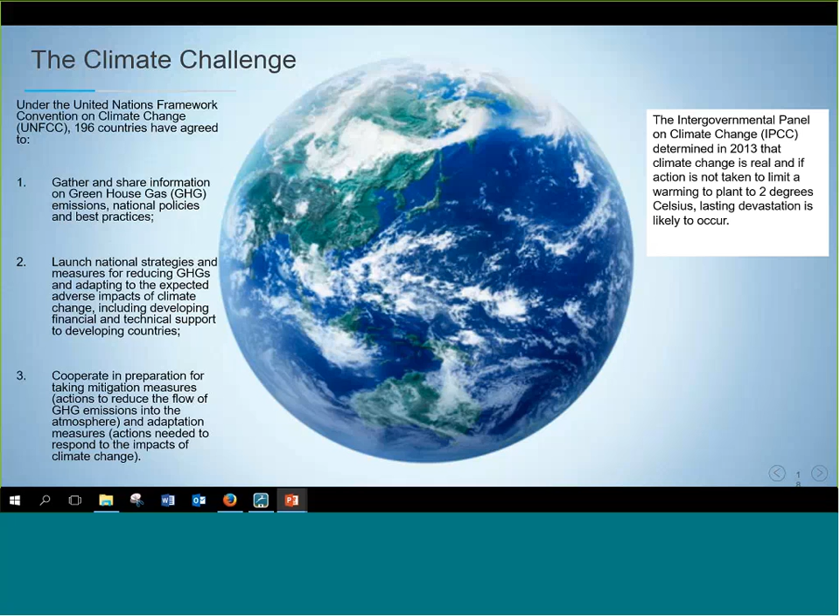On the next slide, you'll see why Paris is important. So far, 196 signatories to the convention will bring to the table intended commitments to reduce each member nation's greenhouse gas emissions through something known as Intended Nationally Determined Contributions, or INDC. In addition to negotiations, negotiators will focus on discussing financial mechanisms to help developing nations achieve their commitments. Additionally, other UN agencies will discuss global policies to reduce emissions, including airline fuel economy and maritime issues, just to name a few, through the International Civil Aviation Organization as well as the International Maritime Organization.

On the next slide, we'll talk a little bit about how we got to Paris and why Paris is important. International climate commitments to limit greenhouse gas emissions really took off in 1997 as many nations signed the Kyoto Protocol on the convention to limit greenhouse gas emissions. Since that time, the signatories to that protocol, known as the Conference of the Parties, or COP, served as a forum to meet periodically to report on activities to reduce emissions and share best practices. The next Conference of the Parties, COP21, will meet in Paris to discuss a successor legal instrument under the umbrella of the UNFCCC to reduce greenhouse gas emissions, with the goal of limiting global warming to just 2 degrees centigrade by 2100.

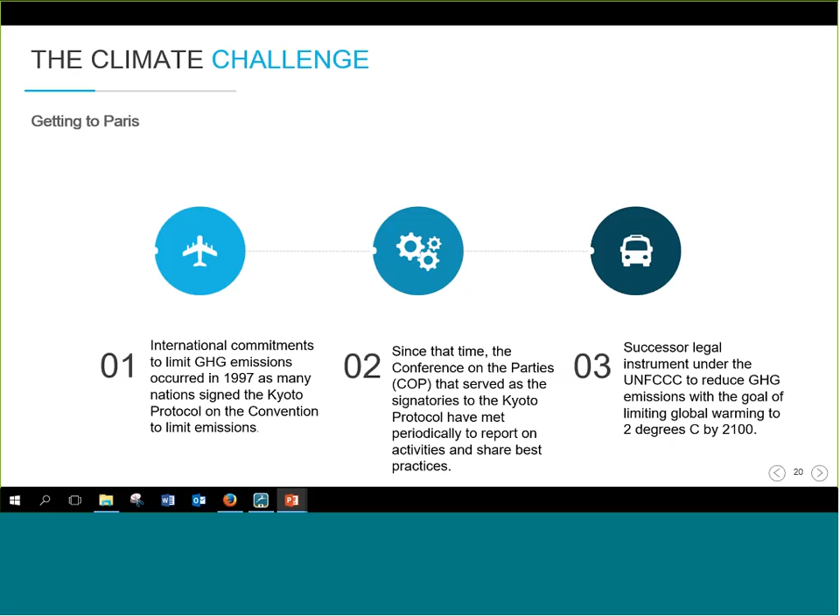On the next slide, we'll dive into a little bit about how the United States intends to meet its climate pledge. The U.S. INDC, the guts of the commitment, is intended to reduce greenhouse gas emissions by between 26 and 28% by 2025 relative to 2005 levels. That is the U.S. climate commitment.

And here on this chart, you can see information pulled from the International Energy Agency that's done some analysis on how exactly the U.S. will get to its climate commitment by 2025. Much of the U.S. commitment relies on regulations that are either promulgated or proposed. The largest source of greenhouse gas emissions from the United States comes from power plants.

And the proposed Clean Power Plan seeks to reduce power plant emissions. Roughly half of the U.S. INDC will be achieved through the proposed Clean Power Plan. However, that plan faces growing legal and even political challenges that may undermine its contribution towards emissions reduction. That makes other features of the U.S. INDC in the commitment that much more important.

In the U.S., the second leading source of greenhouse gas emissions is attributable to transportation. Rules on the books pertaining to fuel economy standards for light-duty vehicles, the so-called CAFE standards, along with similar standards for heavy-duty commercial vehicles—the Phase 1 standards in effect for model year 2014 through 2018, and the proposed Phase 2 standards that build on Phase 1, set to take place 2021 to model year 2027—are estimated to contribute collectively about 10% to meet the U.S. greenhouse gas emission reduction goal laid out in the U.S. INDC.

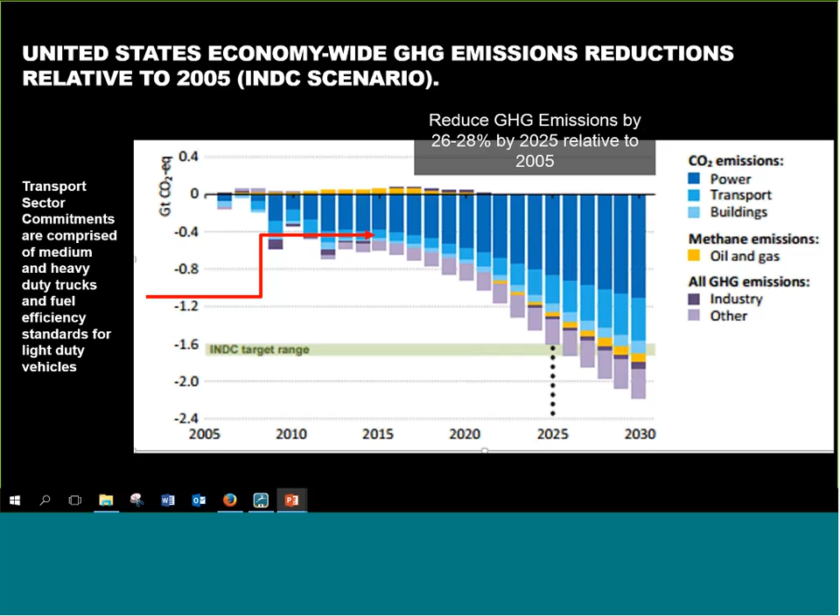Thank you, Ezra. This is Allen Schaeffer speaking. Now we'd like to turn to which technologies will help achieve these greenhouse gas emission reductions. The complexity of the challenge to reduce climate change emissions is enormous, and the plan to reduce those emissions must be considerate of the near term and the longer term of various capabilities and technologies.

We believe that some of the criteria that must be considered in the evaluation of which fuels and technologies, primarily for transport and industrial use, are here on this slide. Technologies that are available, affordable, reliable, proven, efficient, maintainable, and clean are ones that will play and should play a leading role in both the near-term and the long-term strategy as we work to reduce greenhouse gas emissions around the globe.

From a transport perspective, we believe that the diversity of the challenge and the number of people that move around the world will require many fuels and technologies, and what works in one particular place will not necessarily work in another. This represents the broad range of fuels and technologies now under consideration or even available in some parts of the world to power vehicles, engines, and equipment.

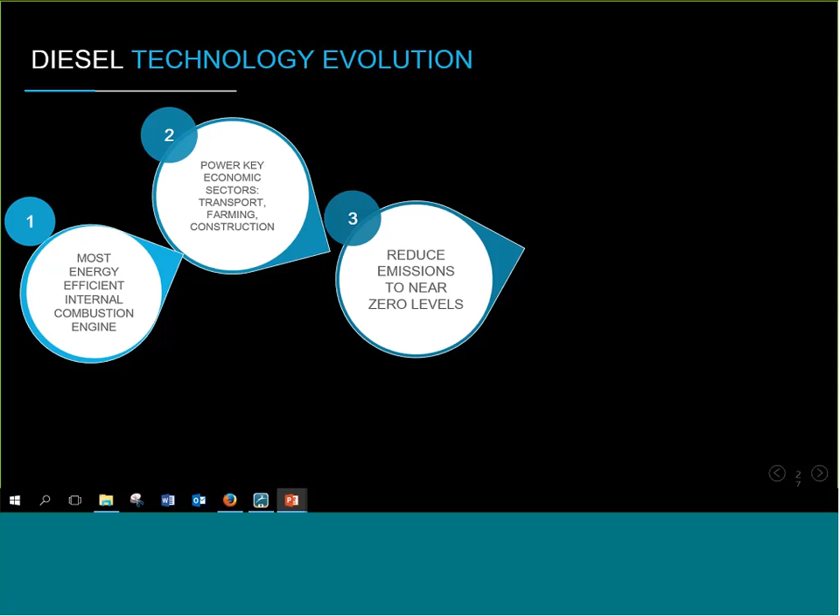Diesel technology has been on quite an evolution over the last 15 years. Beginning here in the U.S., we understand the energy efficiency capabilities of diesel engines as the most energy efficient internal combustion engine available. That has led to its position today powering key sectors of the economy. In the last 15 years, we have worked to reduce emissions to near zero levels. Emissions of particulates, oxides of nitrogen, and other compounds from new engines are now near zero levels. Going forward, we are seeing diesel engines being investigated and modernized for increased efficiency, and hybridization is part of that, but also the expanded use of renewable biofuels.

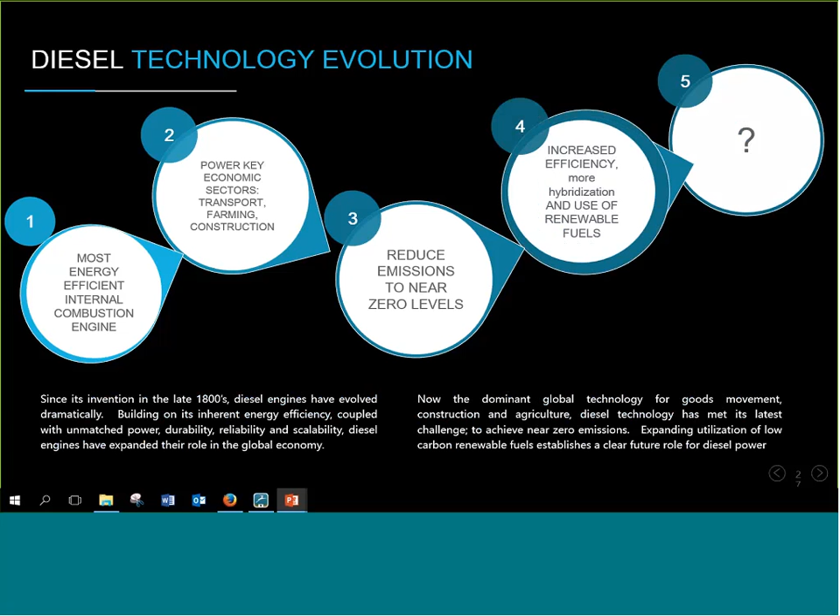And where does the future take us from there? We are yet to envision that completely. However, we can expect an expanded use of diesel power throughout the globe. Being able to compete and provide an advanced technology and fuel in so many places to serve so many needs is essential, and diesel can do that because of its key attributes of being efficient, economical, powerful, and very low emissions today. It is also a fuel that is widely available throughout the world, and its fueling infrastructure, maintenance networks, and other supporting structures are well in place.

The last 15 years in the U.S., we have been working to transform diesel to a clean technology, and this has involved three basic steps. First, the introduction of ultra-low-sulfur diesel fuel. This provides a foundation from which advanced engine technology can be developed and manufactured. And finally, the use of advanced emissions control technology, such as particulate filters, catalysts, and selective catalytic reduction systems can be incorporated. Together, these three pieces make up the clean diesel technology available throughout the world today.

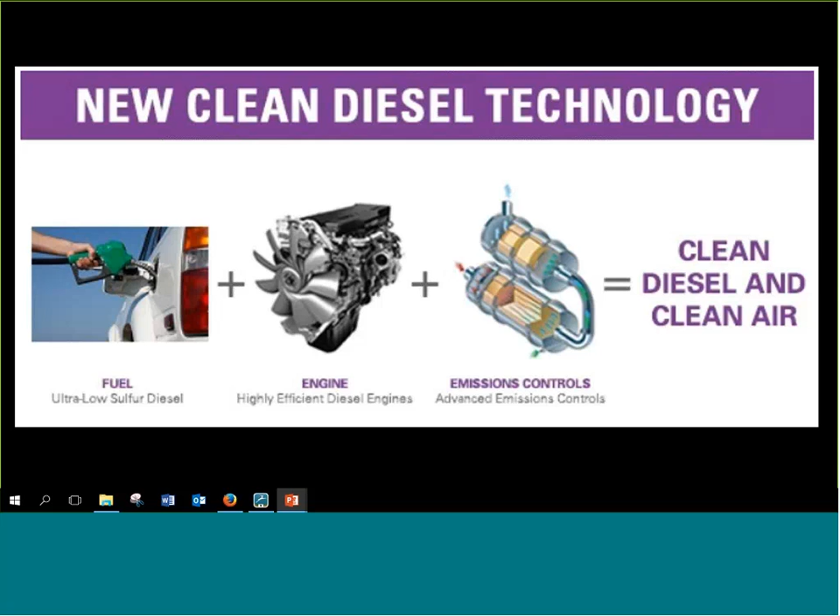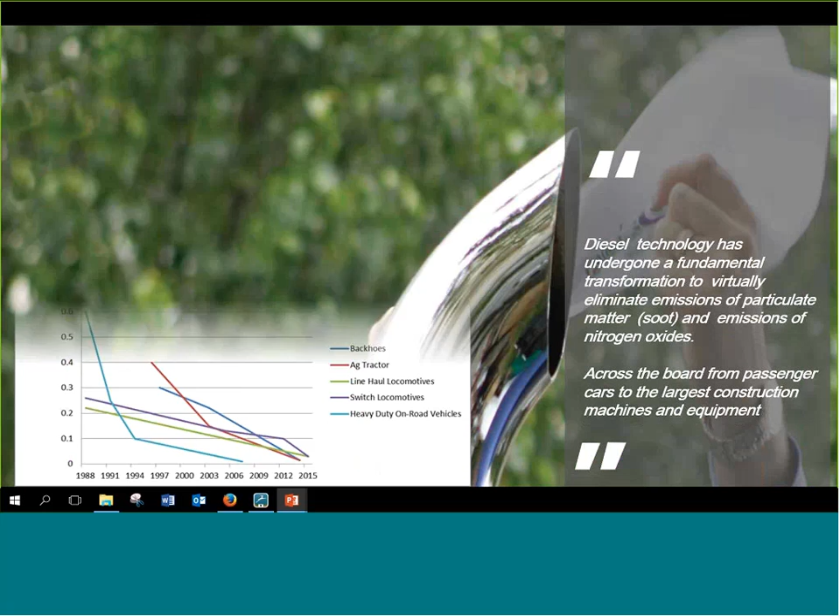One of the key factors of getting diesel to near clean has been the need for ultra-low-sulfur diesel fuel. As a result, we now see the availability of this fuel in the U.S. nationwide as our standard fuel and technology. Across the board, we can find these cleaner fuels being used in everything from passenger cars to the largest construction machines and equipment. And you can see the emissions progress that has been made with diesel of all kinds over the last almost 20 years now.

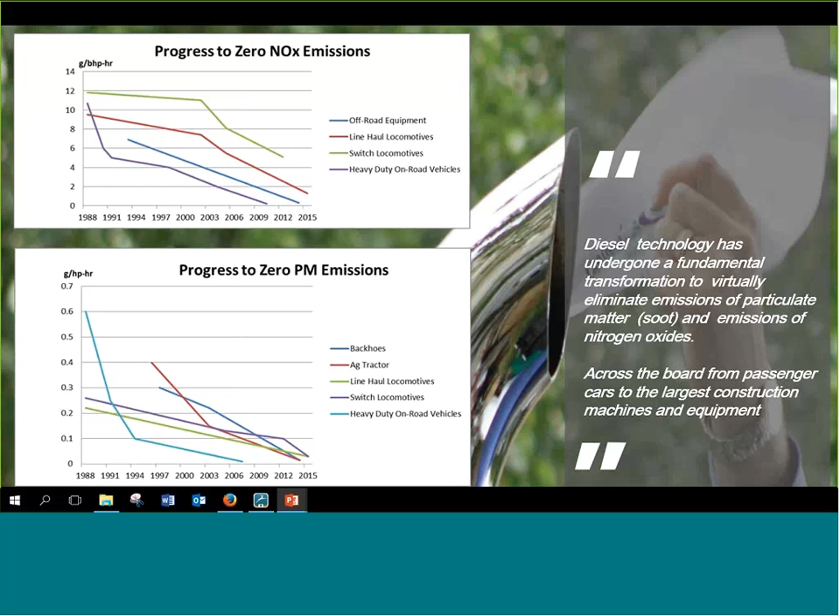This chart shows both the reduction in nitrogen oxide emissions and particulate emissions that have occurred in everything from off-road machines and equipment to locomotives and farm tractors. You can see here that all of these lines converge near the x-axis, or near zero. So today we are in a position of having diesel technology being very near zero emissions. And this positions the technology for the future.

One of the key aspects of that future is an expanded use of renewable and advanced biofuels. And we believe that those will play a key role throughout the world in helping to make sure diesel is a sustainable energy technology in the future.

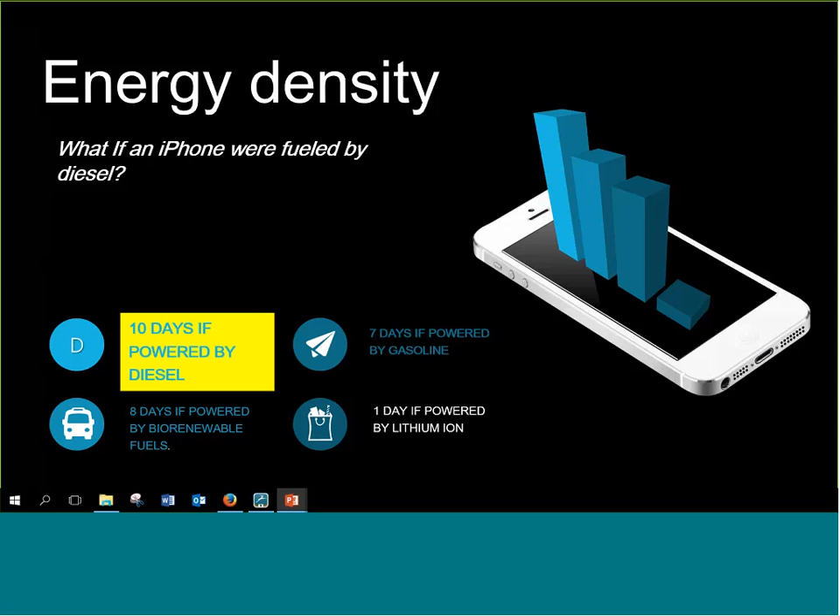One of the key attributes of diesel is its inherent energy efficiency and energy density of its fuel. We recently evaluated what would happen if an iPhone were fueled by diesel. Looking at the energy intensity of various fuels and technologies, an iPhone today, if powered by diesel fuel, would last 10 days on a single charge. The typical average use today is approximately 1 day if powered by a lithium-ion battery, which is of course what phones are powered by. This simple example provides insight into why diesel power is going to continue to be an important part of the future in meeting climate change objectives. That is because of the energy density of the fuel and its efficient combustion by the diesel engine.

We'd like to turn now to what is needed to help meet these global climate challenges relative to diesel technology particularly.

First and foremost is the availability of ultra-low-sulfur diesel fuel. This map shows the relative levels of diesel fuel sulfur around the world today. You can see in the lightest blue areas, North America predominantly has very low sulfur diesel fuel. There are some parts of the world still finding very high levels of sulfur in their diesel fuel, and parts of South America also in some of the higher ranges. But having ultra-low sulfur diesel fuel is critical to making future progress, both in reducing carbon emissions as well as reducing emissions of particulate and nitrogen oxides.

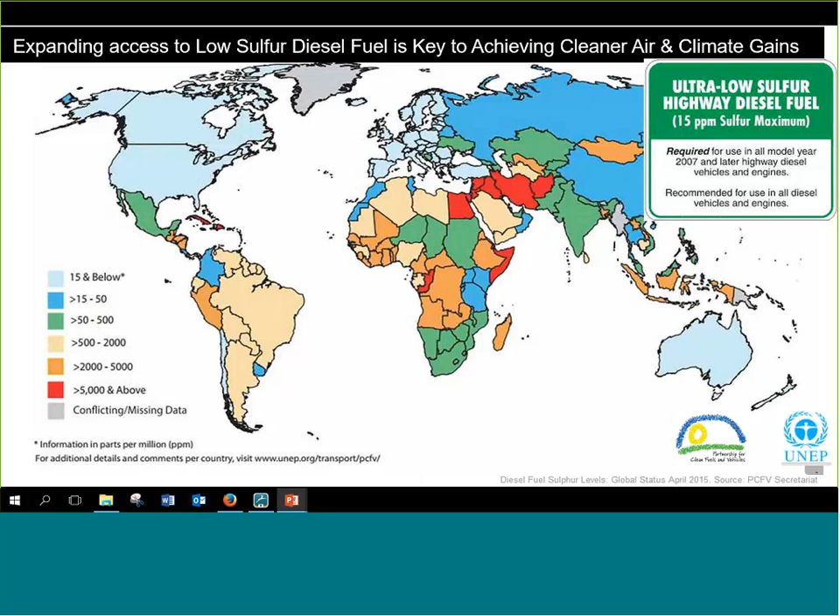One of the reasons the global community is increasingly interested in reducing particulate emissions is because of the role of black carbon. Black carbon is identified as a short-lived climate pollutant, meaning it has a shorter lifespan in the upper atmosphere than other greenhouse gases such as carbon dioxide or some hydrofluorocarbons. So reductions in emissions of soot or black carbon can produce some near-term gains in terms of lower greenhouse gas emissions and warming conditions.

Diesel engines are an emitter of black carbon or soot and particulates. All internal combustion engines emit some level of particulates into the air, but thanks to the new generation of clean diesel technology, we're seeing a dramatic reduction in the contribution to black carbon emissions.

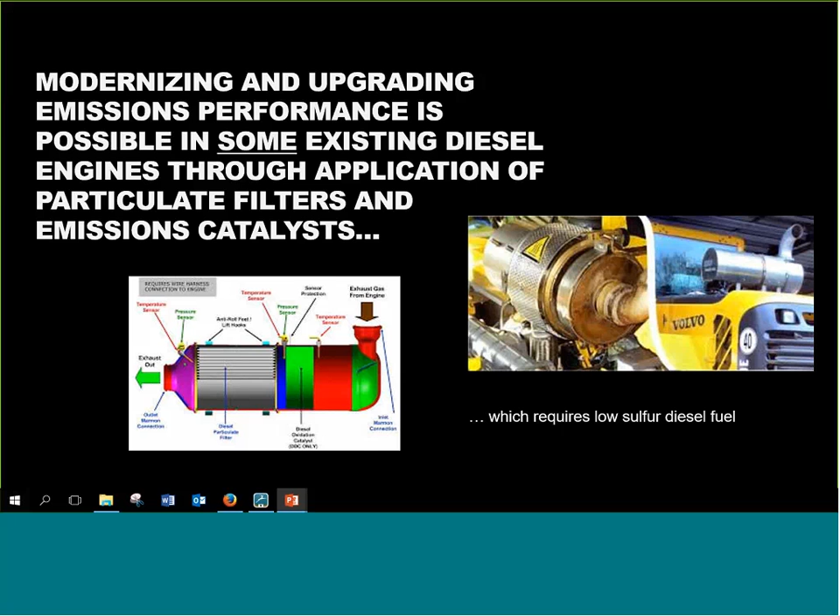This is a practice that works well when there is ultra-low-sulfur diesel fuel available and the proper technology is matched to the proper engine. We have experience in the United States with modernizing and upgrading diesel engines of all kinds, from school buses to some of the largest marine and locomotive engines. It is an extensive process in many cases, and it is appropriate for some, but not all kinds of machines and equipment. Again, it does require the use and availability of ultra-low-sulfur diesel fuel to be most effective.

As we mentioned earlier, the use of diesel engines in the future will likely be with more renewable fuels and biodiesel fuel blends. These are part of the long history of diesel technology throughout the world, but using more renewable fuels in the future will help reduce carbon emissions as well as greenhouse gas emissions.

The diesel engine, as one of its key attributes, has the capability to burn a wide variety of renewable diesel fuels from a range of feedstocks, including both raw and waste vegetable products and animal fats that have been processed in other ways. When properly prepared and made into a quality mixture, biodiesel fuel can be used in various concentrations and typically is found at a 20% level mixed with petroleum diesel. This has a positive impact on both emissions of particulates and nitrogen oxides, as well as carbon dioxide emissions.

One of the more advanced renewable biodiesel fuels is fuels like diesel HPR. This is basically a hydrocarbon replacement fuel. It is a drop-in substitute fuel for diesel, which means that diesel engines do not require any kinds of adjustments or any specific changes to be able to utilize this fuel at various blends.

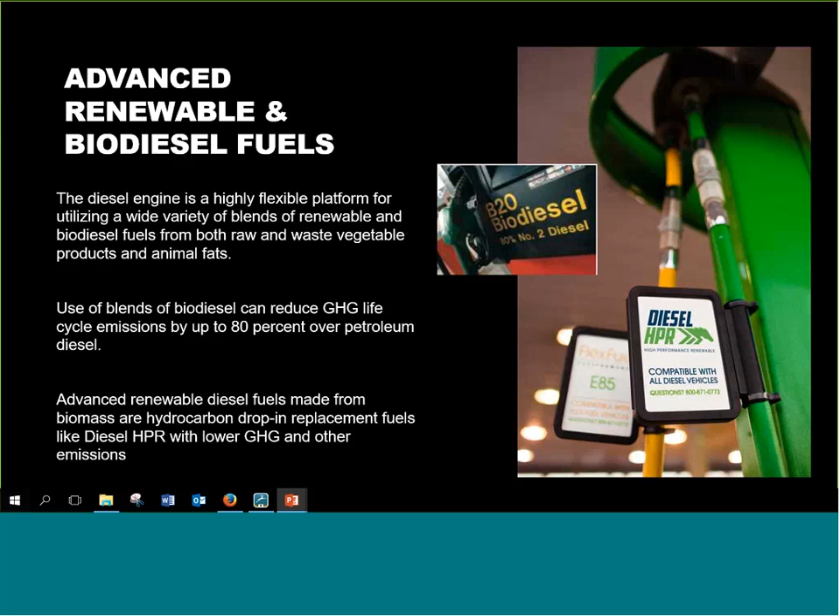We'd like to turn to a number of case studies and provide some additional insight on the importance of diesel going forward and how clean diesel technology can help meet the climate challenge.

According to population statistics, the world population is expected to increase by approximately 1 billion people in the next 10 to 15 years. To feed those larger numbers of people around the world, we need to have more productive and efficient farming practices.

Part of the productive and efficient farming practices comes from the tractors, machines, and equipment used to plant and harvest crops. Part of the efficiencies in lower fuel consumption and lower emissions come from how the machines connect and are integrated with the land and the use of the land.

What we find today is that on large expansive acres in South America and other parts of the world, very large tractors today are doing the work of multiple tractors from 10 or 15 years ago because of their power and ability to cover large territory in a relatively shorter period of time. These are all powered by diesel engines, again because of their efficiency, reliability, and durability.

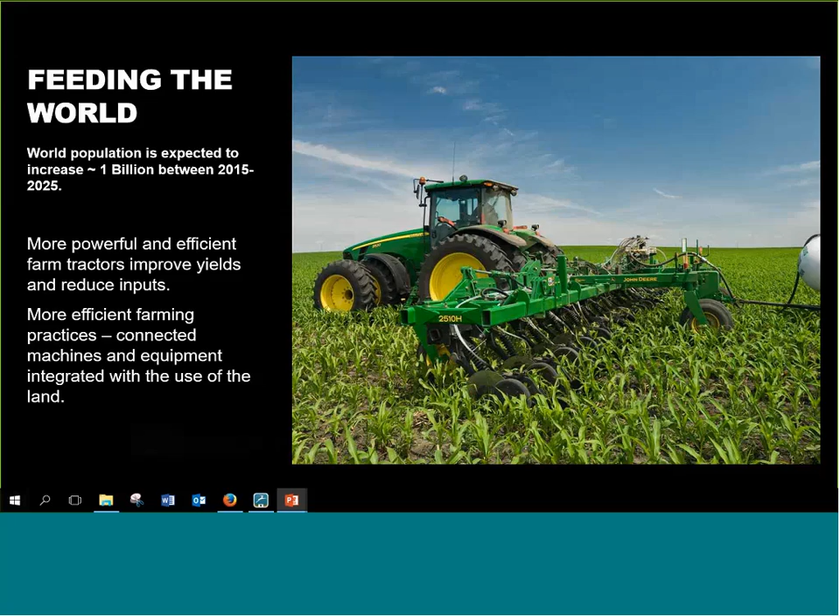We have witnessed in recent times here in the United States some innovative efforts to transition quickly to lower carbon fuels. This is a most recent case study from the city of Oakland, California, near the San Francisco Bay Area. The city of Oakland made a commitment to begin using renewable diesel fuel in all of its city-owned vehicles—approximately 250 vehicles that use about 230,000 gallons of fuel per year.

The city made this change to reduce its carbon footprint and meet the greenhouse gas reduction targets established by the city. All of the diesel engines and equipment that were in place were able to use this new fuel without any modifications, which delivered near immediate benefits for the city.

One of the areas where we also see diesel playing a key part in the future in a sustainable, carbon-reduced world is in providing expanded public services. With economic growth comes request and demand for public services such as public safety, public health, clean drinking water, and effective wastewater disposal and treatment.

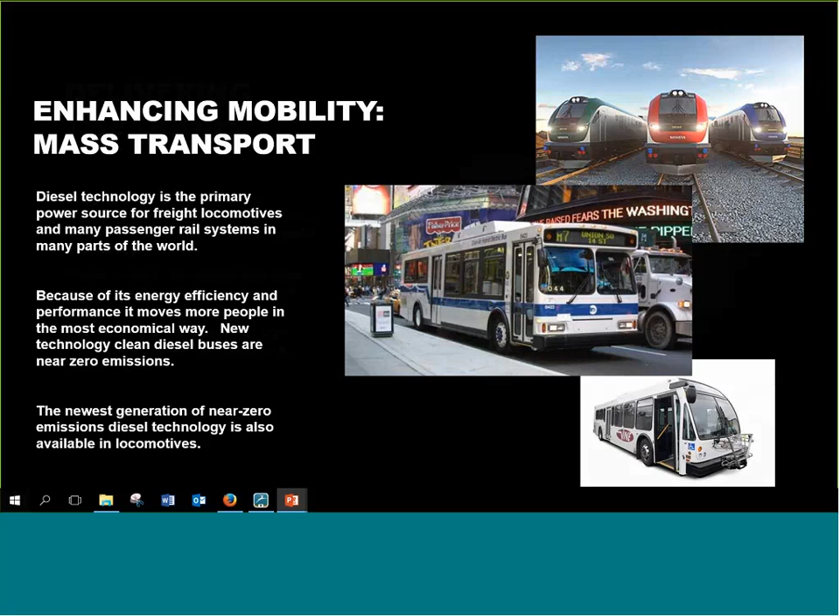You understood earlier from Ezra Finkin's comments about the role of diesel power in helping to meet the future greenhouse gas commitments of the United States. These are the kind of vehicles that are expected to contribute to achieving those emissions reductions and efficiency gains in the future.